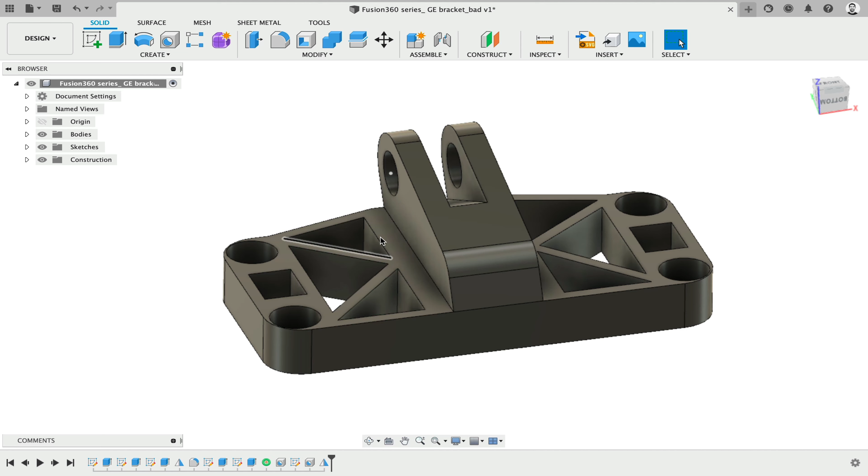My name is David and today I'll be designing and optimizing a jet engine bracket for CNC machining in Fusion 360. I got the idea from a design challenge held by GrabCAD and General Electric, in which they challenged engineers to optimize a bracket. For this video, I closely recreated the bracket and added some design aspects that could make CNC machining more complex, that are very common and that I see quite often here at Hubs. Specifically, the use of thin walls and sharp corners.

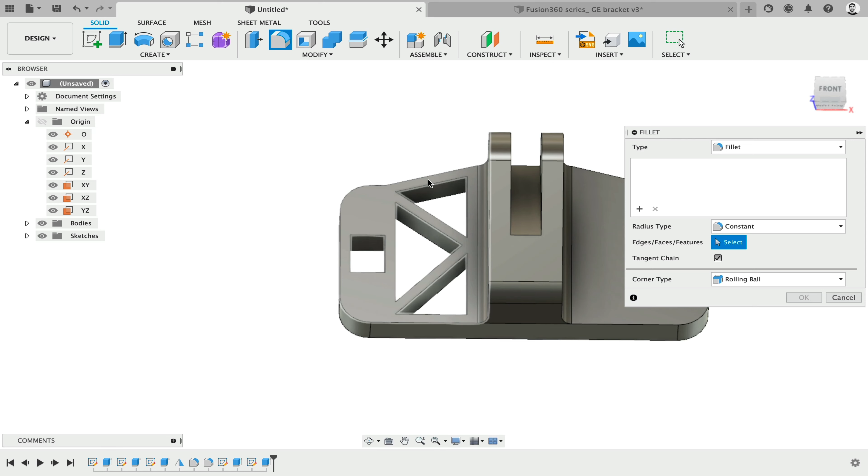First, I'll explain why thin walls and sharp corners are problematic for manufacturing of this and any other design. Next, I'll remodel the whole bracket, paying extra attention to avoiding thin walls and sharp corners. So here we have the bracket and you can see what we mean by sharp corners looking at this area.

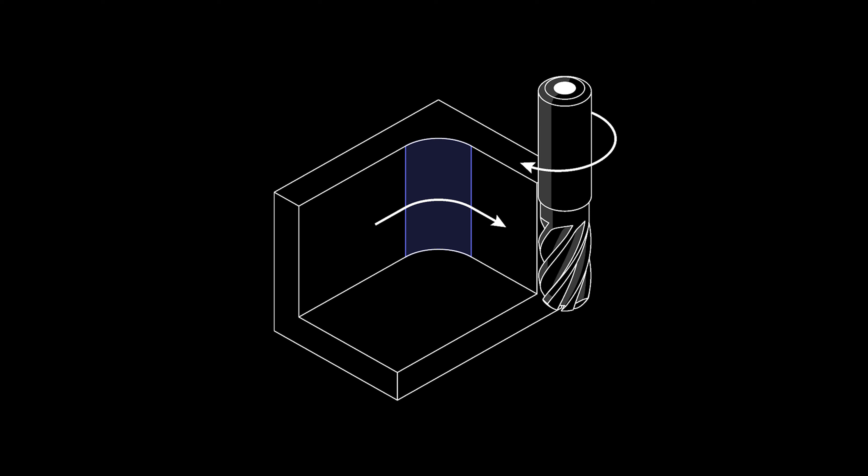The problem with sharp corners is that they are difficult to machine. This is due to the fact that the two most common CNC cutting tools, end mills and drills, are cylindrically shaped and have limited cutting length. That means that the geometry of the tool determines the radii on the part, and so the inside corners of the part will always have a radius. There are ways to make 90-degree corners in CNC machining by using undercuts and special tools as well as EDM. However, this requires more time and money in comparison to standard tooling.

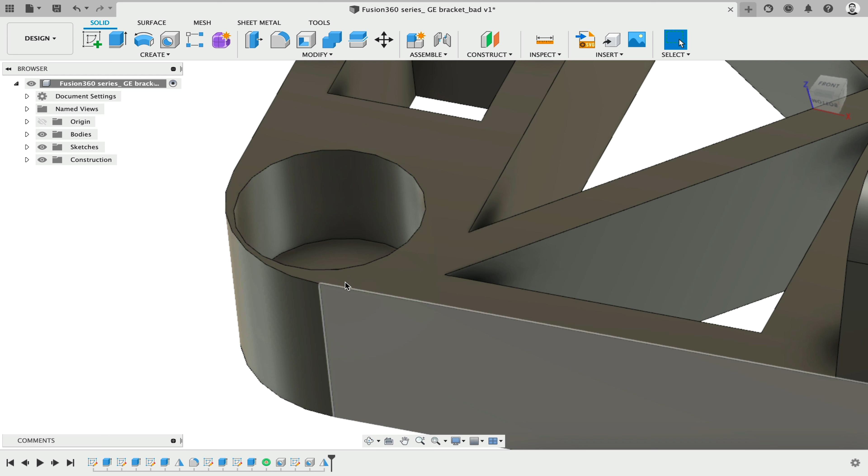Next on the bracket, you can see here that these walls on the edges of the bracket are very thin. Decreasing the wall thickness reduces the stiffness of the material, which increases vibrations during machining and lowers the achievable accuracy. This might not be so problematic with metals, but especially plastics are more prone to warping and thermal softening, so a larger minimum wall thickness is required. Now that we've discussed why sharp corners and thin walls should be avoided, let's remodel the bracket.

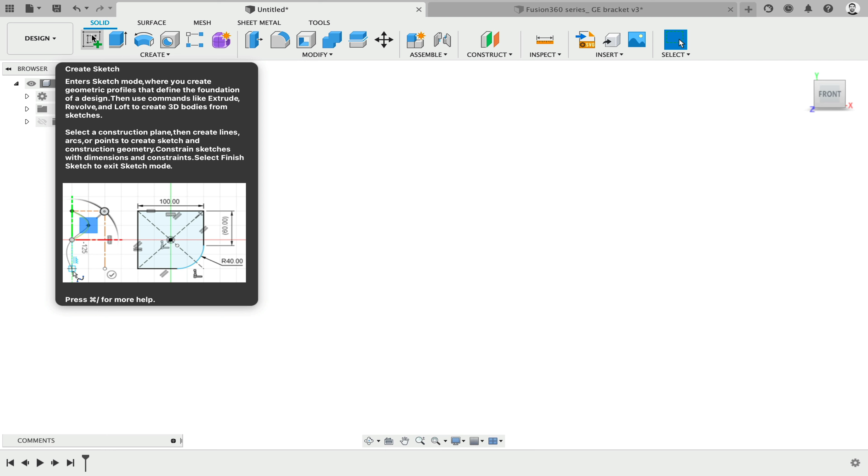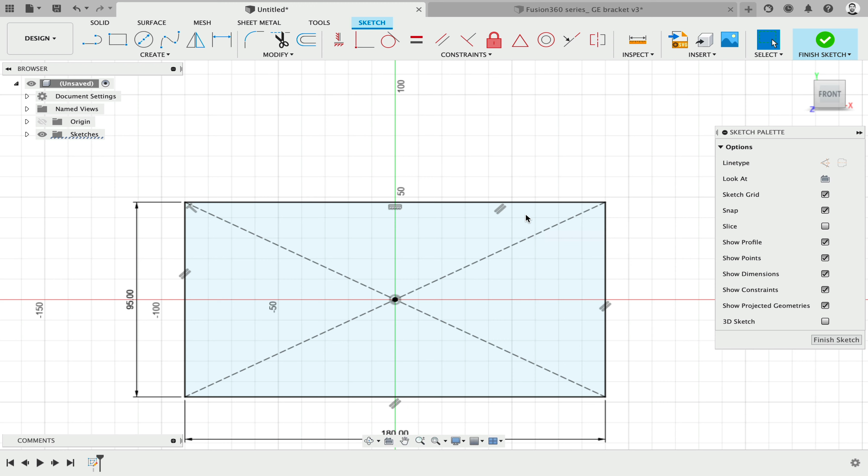Alright, now I'll start recreating the model. I'll first start with the first sketch. And just starting out with a rectangular shape, then give it my dimensions, 95 and 180, which is very similar to the GE bracket. Then I'll extrude it to be 22.5 millimeters thick.

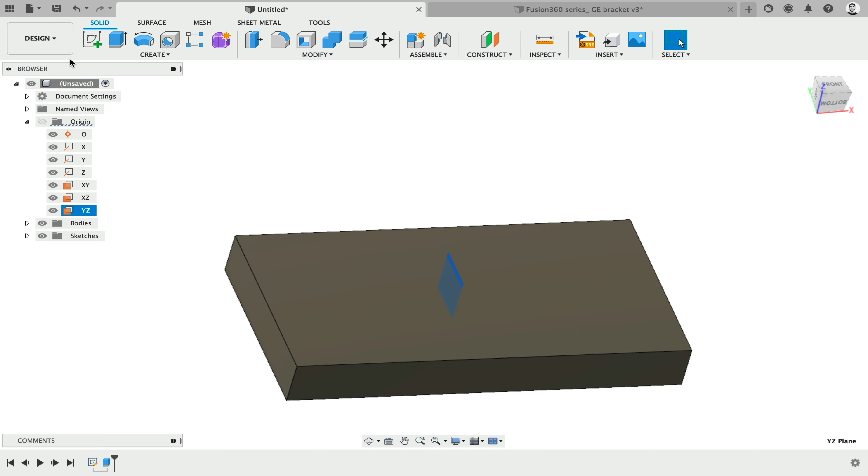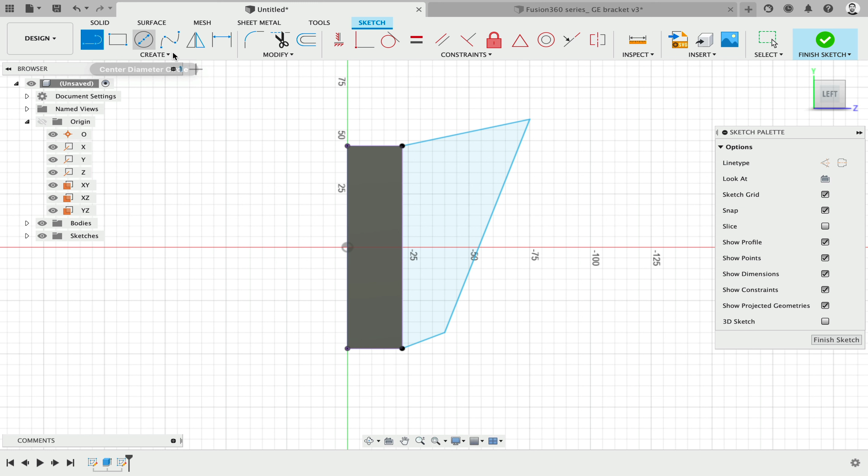Next, I'll be extruding the middle section. So I'm starting my sketch on my middle plane, just projecting this surface, so I have it in my sketch. In the beginning, I'm just kind of eyeballing my geometry. And then I'm actually placing a circle here. The circle needs to be tangent with the lines. And then I'm just trimming off the tip.

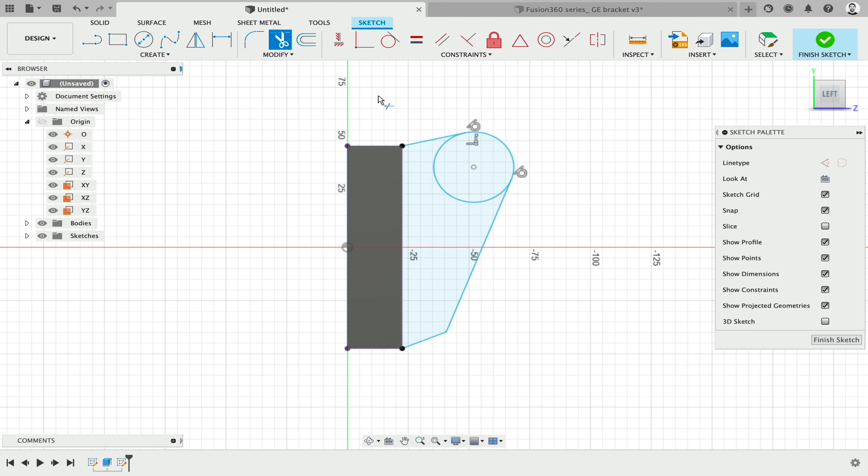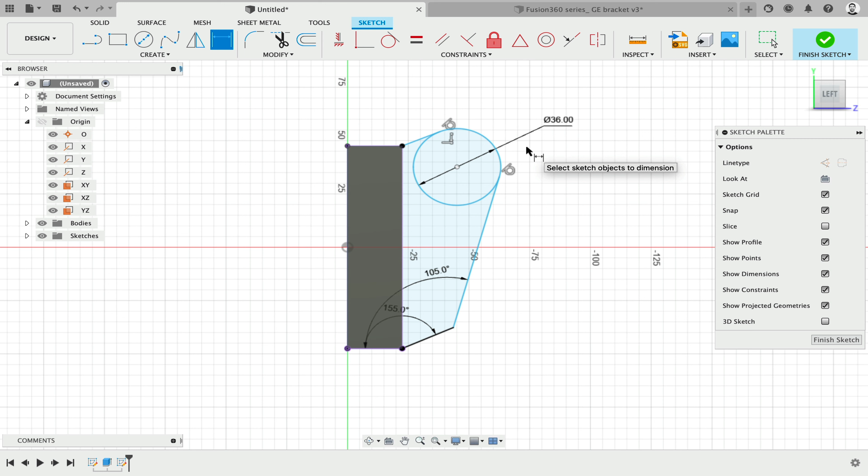And next I will be dimensioning my sketch here. I'm gonna give this an angle of 155 degrees. Gonna give this an angle of 105 degrees. The circle is gonna have a diameter of 36 millimeters. This angle is gonna be 152 degrees, and then finally the distance from the bottom of the bracket to the center of the circle is gonna be 44.5 millimeters. That's pretty much it.

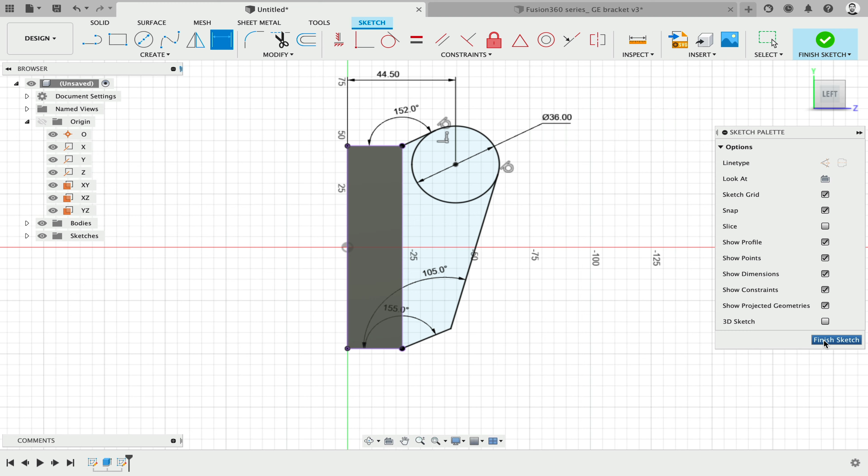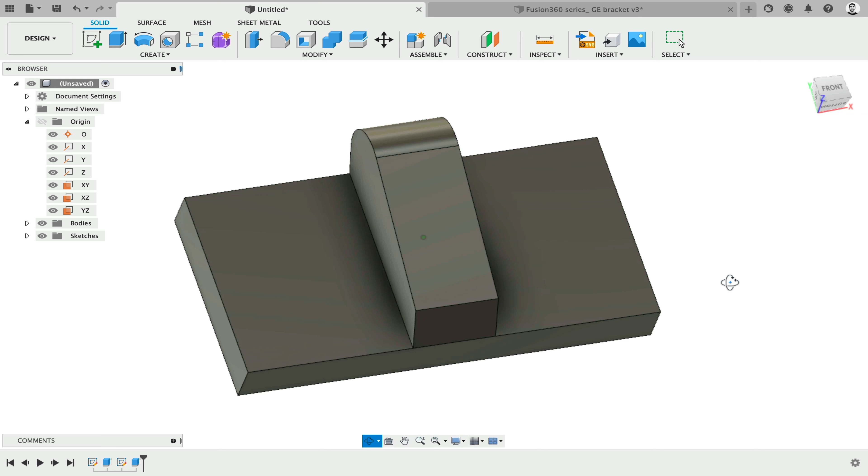That's my sketch on the middle plane, and now I'm gonna extrude the whole sketch symmetrically by 36 millimeters. All right, that's it. That's the base shape. Then I will be adding my cutoff here. And to do that, I will be sketching on this plane. First have an easy shape, and then later I will dimension them. Okay.

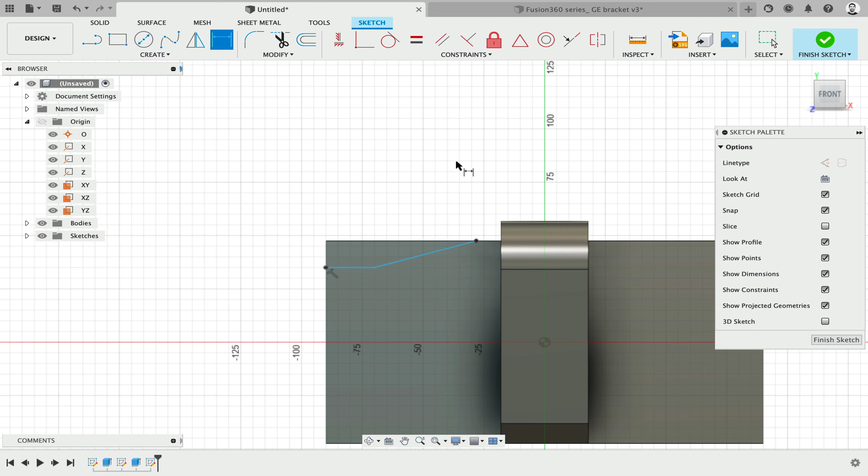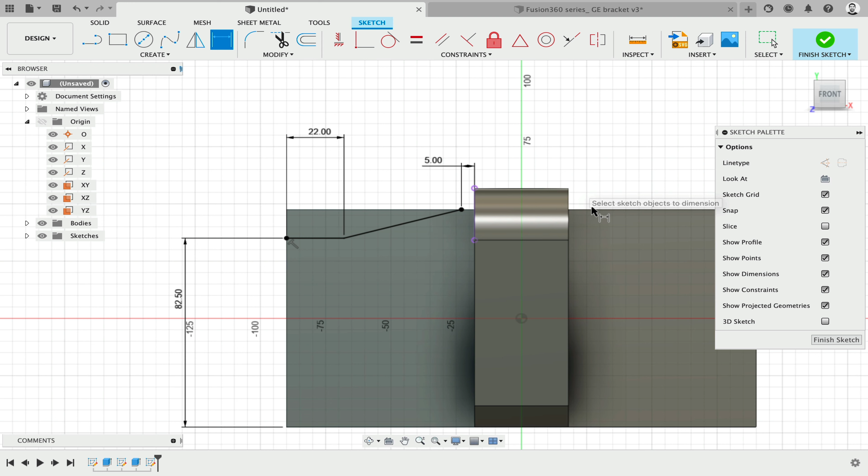This side will be 82.5 millimeters long. I hit it on the spot there. This side will be 22 millimeters long. And then for this cutoff, I will just have a distance of 5 millimeters to this side. I'm already choosing 5 millimeters there because I will be adding a 5 millimeter fillet later. All right, that's my cutout that I will be having there.

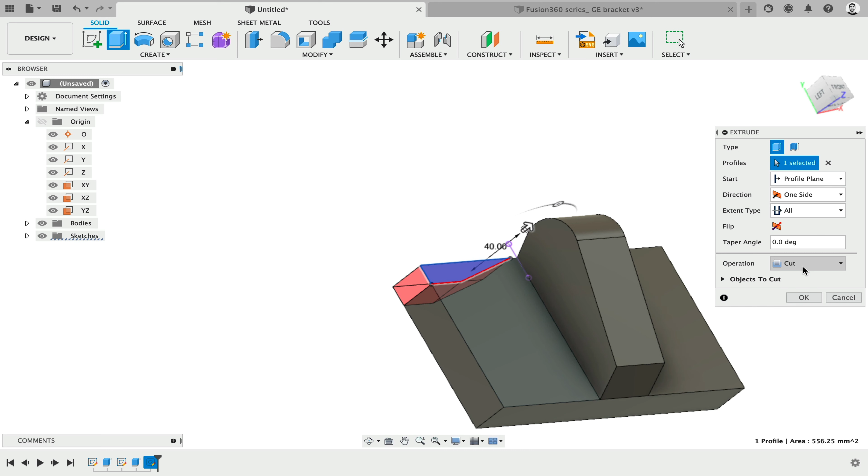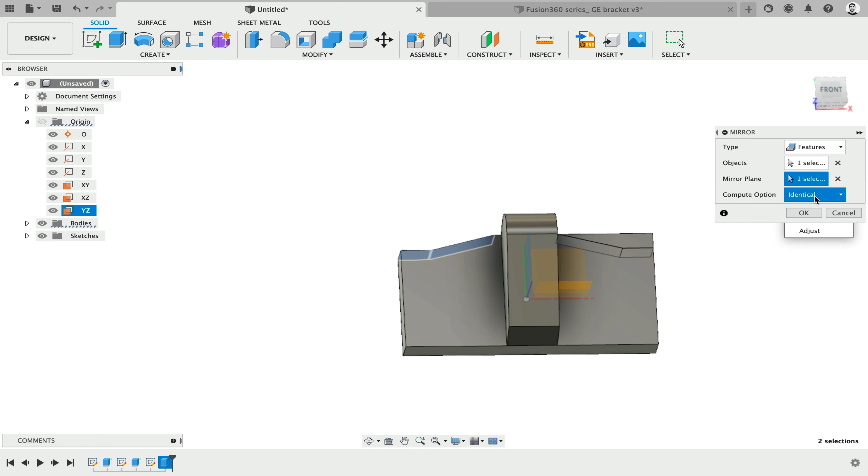Just extrude it just on one side all the way through, and it automatically goes to a cutting operation. All right, I will be just mirroring this feature on my mid plane to have the same cut on the other side. In this case, I think identical and adjust will give the same results, but for me, to be sure, it needs to be identical on the other side. All right.

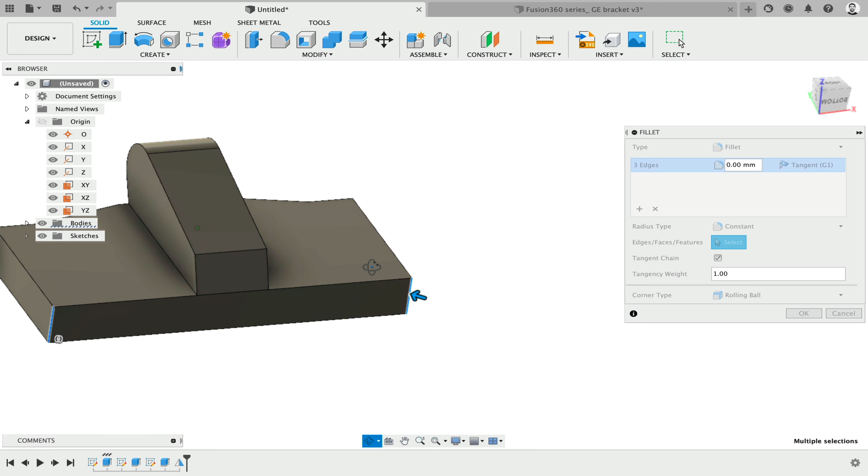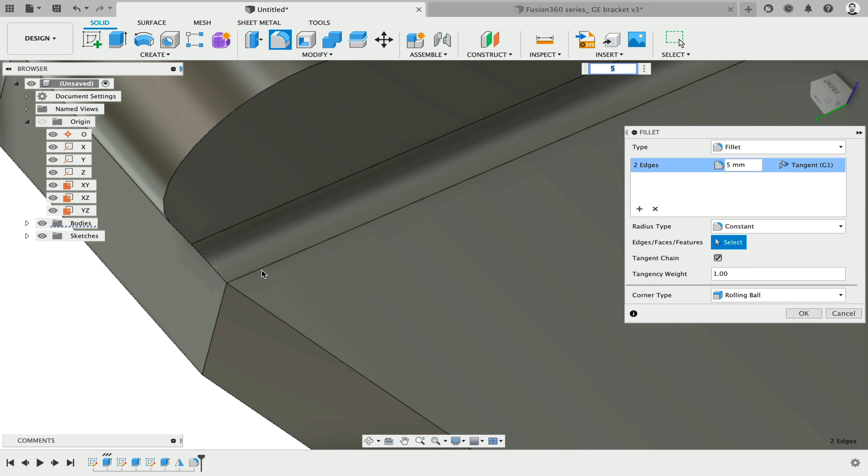Next step, clean up the geometry a little bit. So I will be adding some fillets on the 4 corners and also on the back of the part. I will give all these areas a 15 millimeter fillet. All right, the same as I said before, those sides where I left some space, give it a 5 millimeter fillet. So then you can also see it's nice and aligned with the spacing that I gave there.

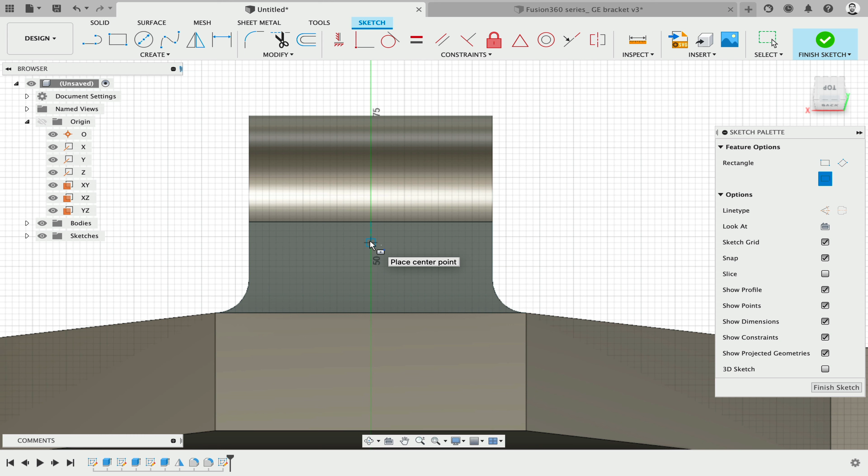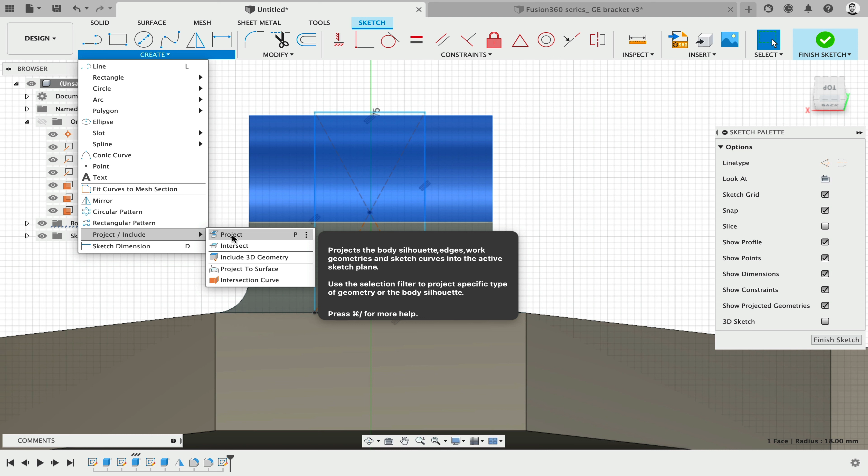I will be actually starting with a cut in the middle here, but I will be sketching on this surface here, and I will also start with the center rectangle that I will be placing on the middle line, and one corner will be at the bottom of the part, and for the others, I will be just projecting this surface and align the highest point of my rectangle with the highest point of the geometry there. The cutout will be 15 millimeters wide.

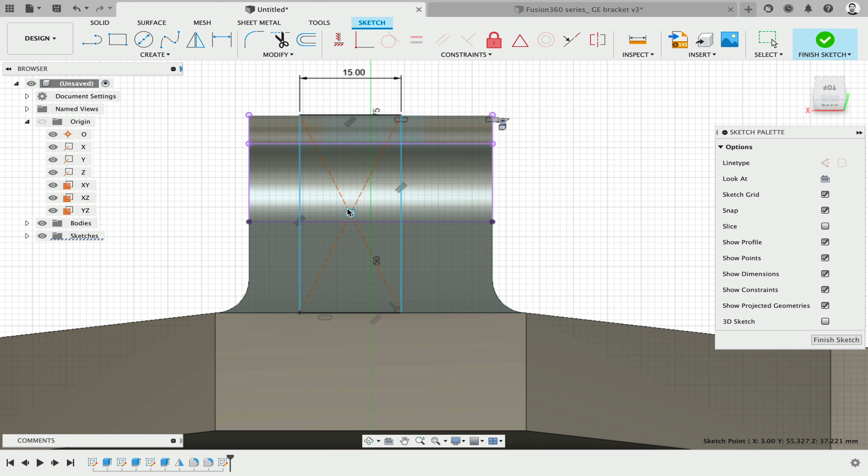It's still not fully defined. I will be defining the middle point of the rectangle to be vertically aligned with the middle point of the part, so the center axis of the part. That's pretty much it for this cutout. Very easy.

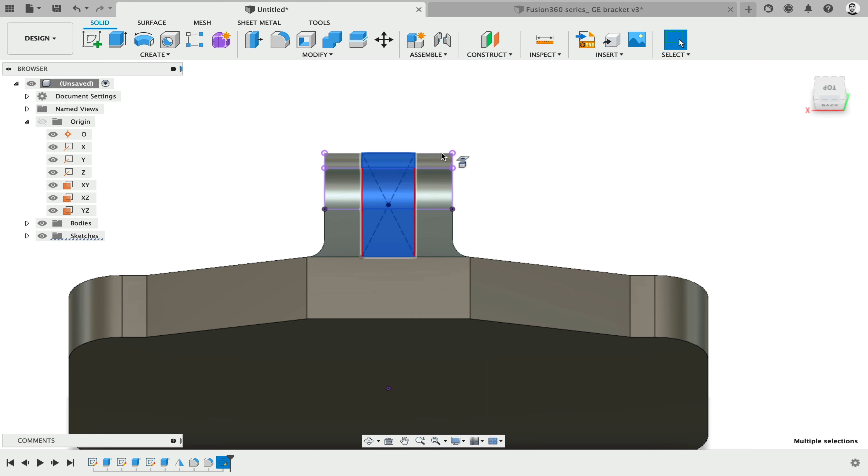Just select all the geometry, all the squares that I want to use as a cutout. Same here. Extrude all the way through. Flip the side. Automatically turns it into a cutting operation, and then just remove that material from the body.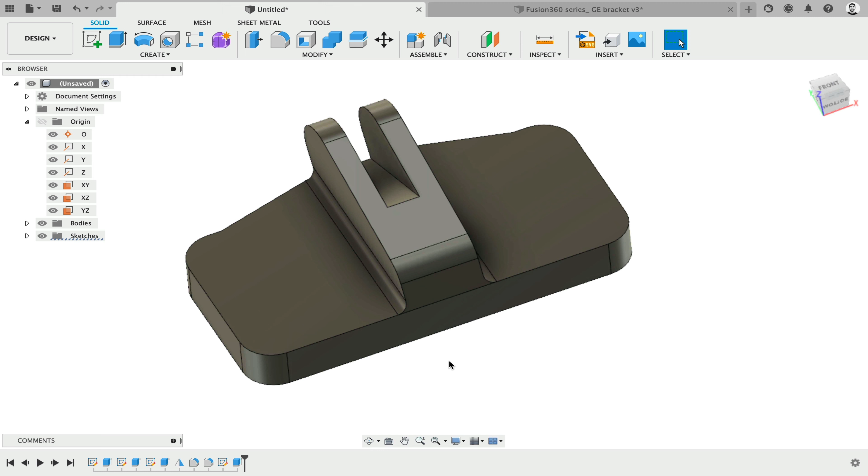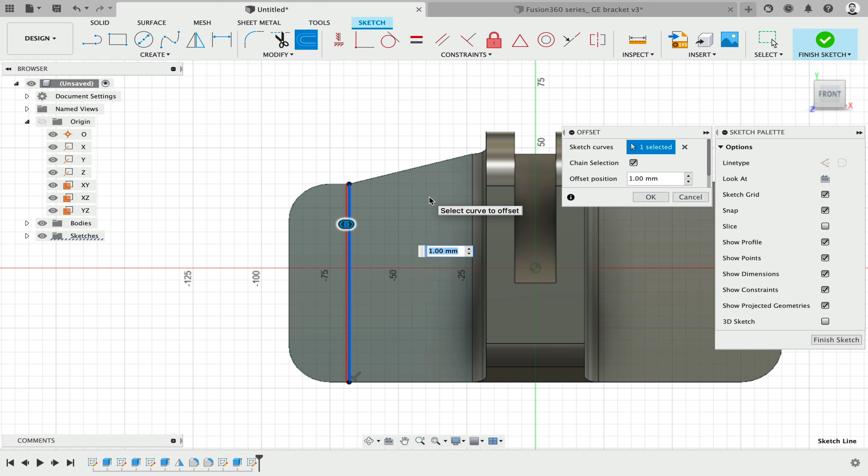All right, next I will be doing the cutouts to reduce the weight on the part, and I'll be starting by creating a sketch on this plane. First thing I'll do, I will draw a straight line from here to here as my reference point. Then for all of this, I will give it a 5 millimeter offset. This one doesn't want to. I will select the edges one by one. Have a 5 millimeter offset on the inside, so -5.

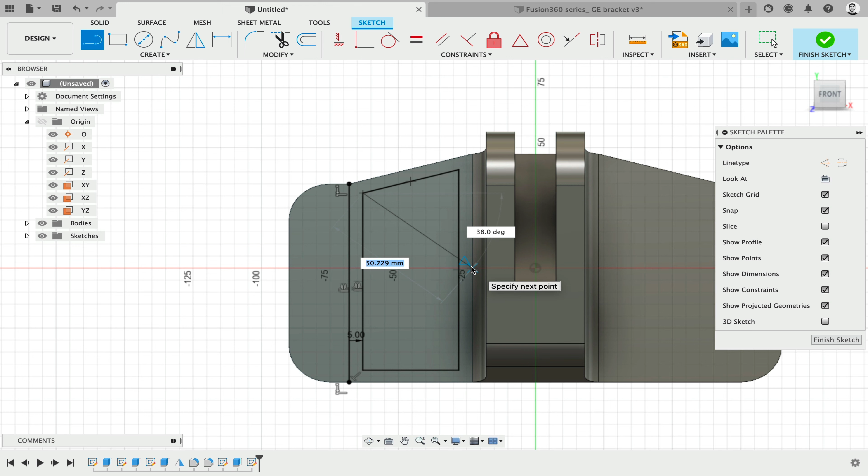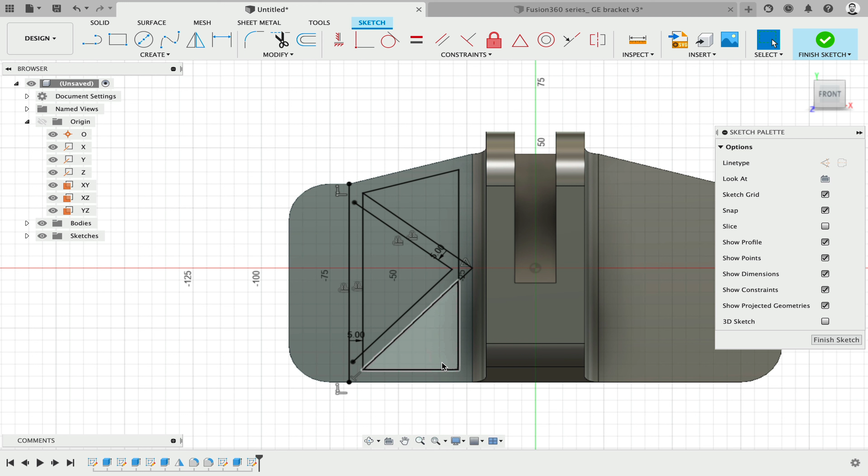And then I will be starting to draw my triangles to divide the spaces, and have another 5mm offset from these lines, 5mm. Alright, and I'll have another rectangular cutout here, which I will be having a 30mm distance from the outside edges on both sides. I will be just copying this value as a reference, so it would change if I had to adjust. From the outside, also here, I leave 5mm spacing.

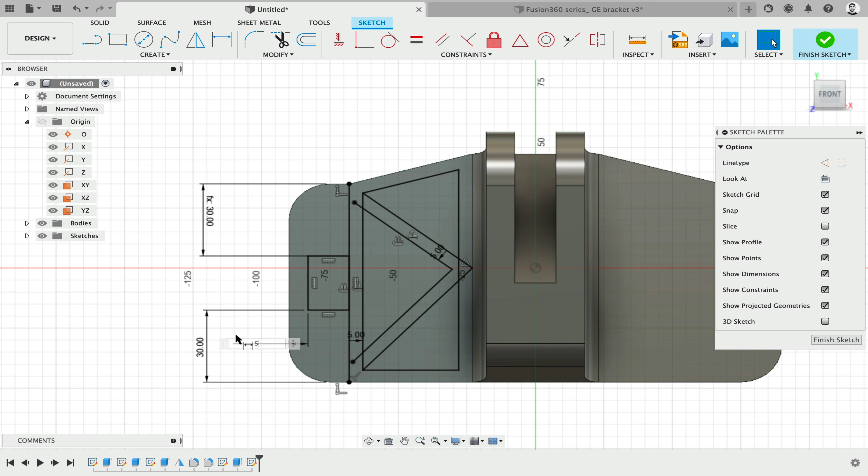Alright, that should define my geometry for the cutouts. Let's see if I did it properly this time. Extrude all the way, flip it around so it turns into a cutting operation, and then we have the cutouts.

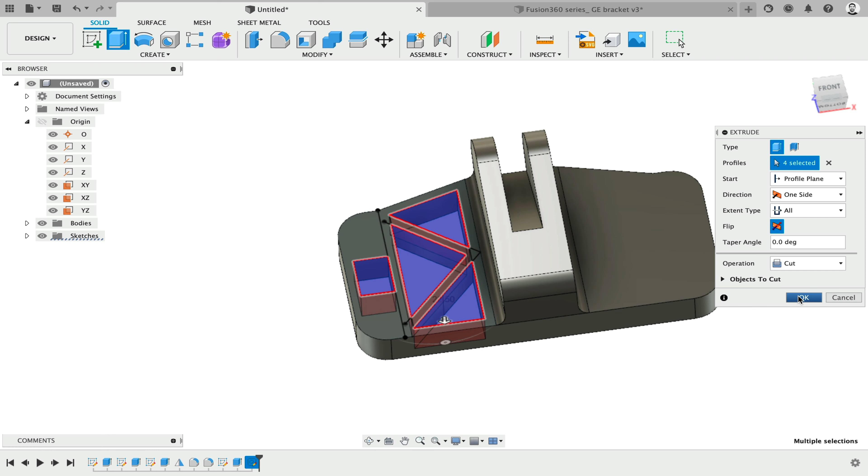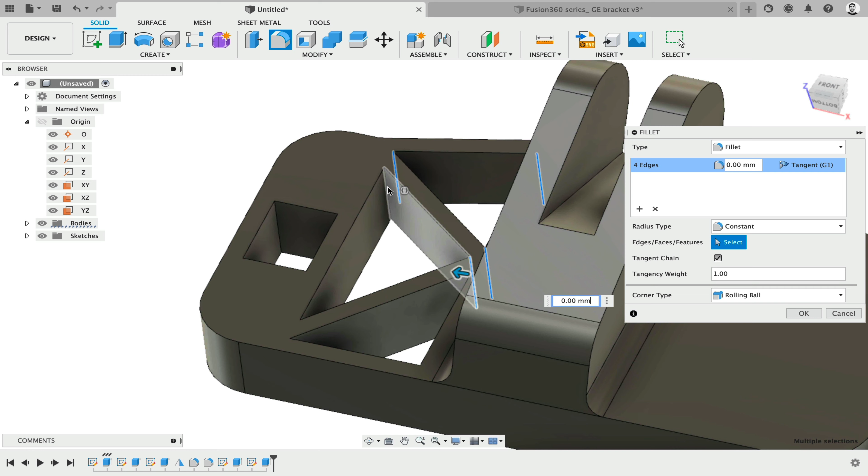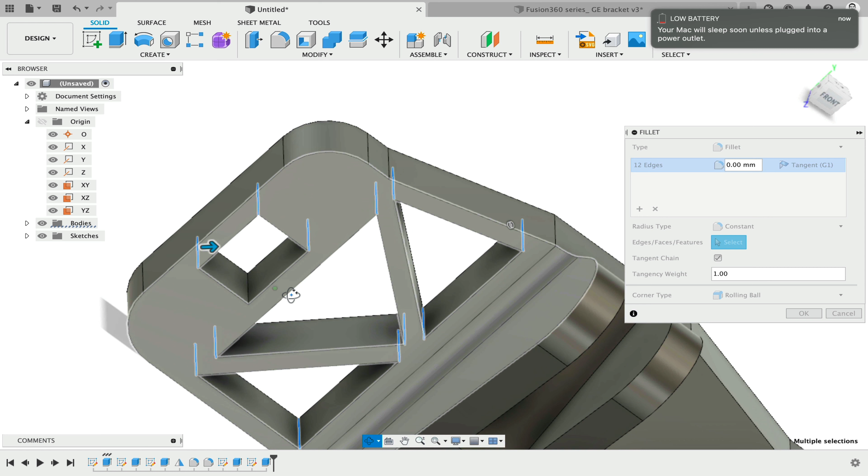Alright, let's give it some fillets. I think I will be giving it a 5mm fillet, so it should be easy to machine with the same tool. First I select all the edges. Oops. Give it a 5mm fillet. Hit enter. And that's it. Nicely shaped cutouts that are easy to machine.

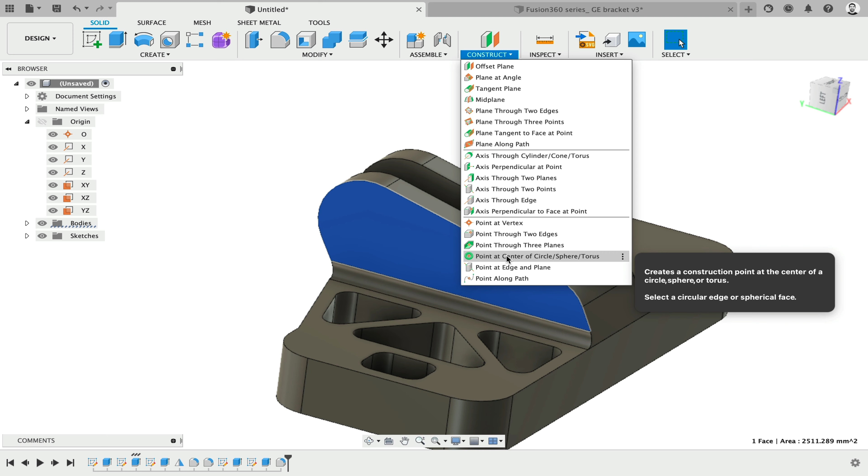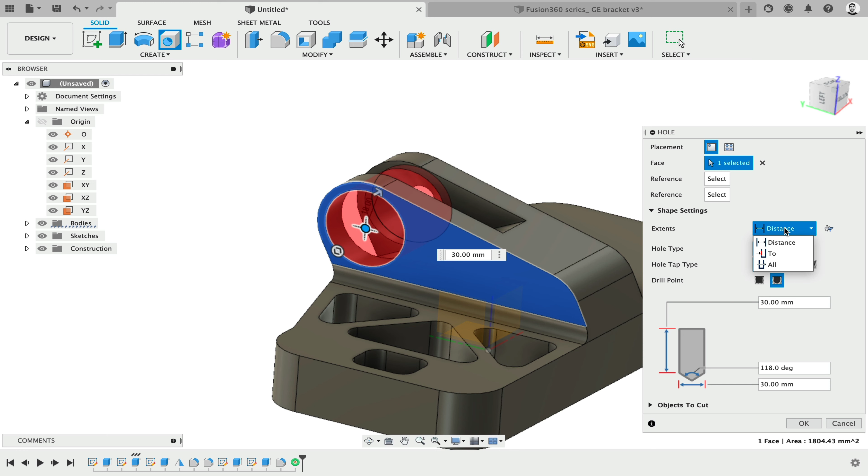Next I will be creating the hole to attach to the main bracket. I will be just creating a point, a construction geometry at the center of a circle. So I'll just be selecting this edge and it automatically creates a center point. And then I can just create a hole that I will be placing on this face, using this point as reference point, selecting that it will extend through the whole geometry and have a diameter of 30 millimeters for that hole. Goes all the way through. Done.

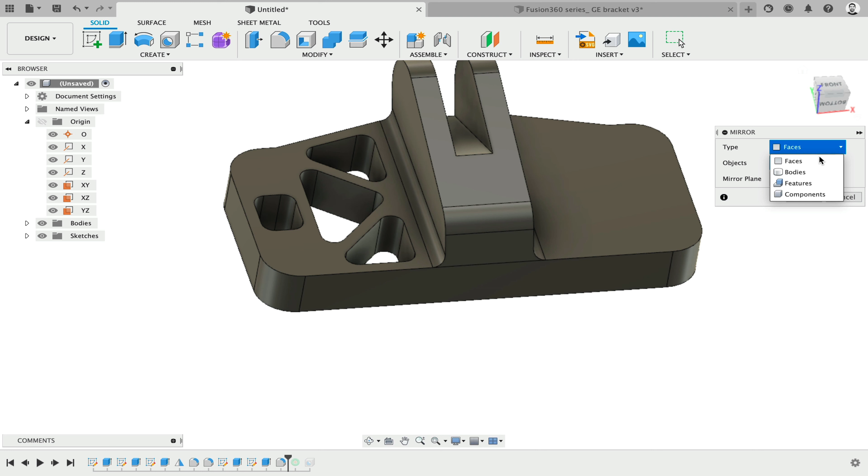I go one step back, something I forgot. The cutouts that I made before, I will also be mirroring them on the other side. To do that, I will select features. I will select the cutout feature as well as the fillet feature. As the mirror plane, I will use my middle plane and have identical cutouts. That's it. It's also on the other side.

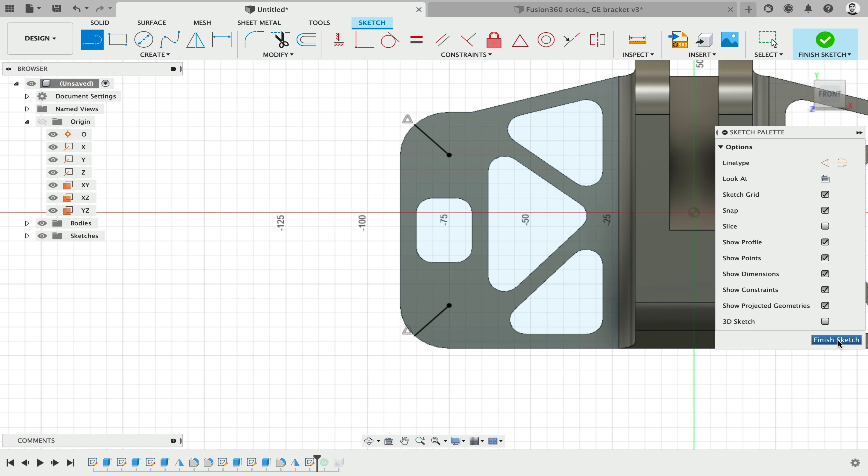Then I will be creating a little sketch on this surface again to position my holes. I will be starting from the center point of this circle and go straight to the corner to be perpendicular with the radius. Do the same on the other side. That's my sketch actually. And then I will be placing multiple holes based on the sketch, and I will be selecting these 2 points.

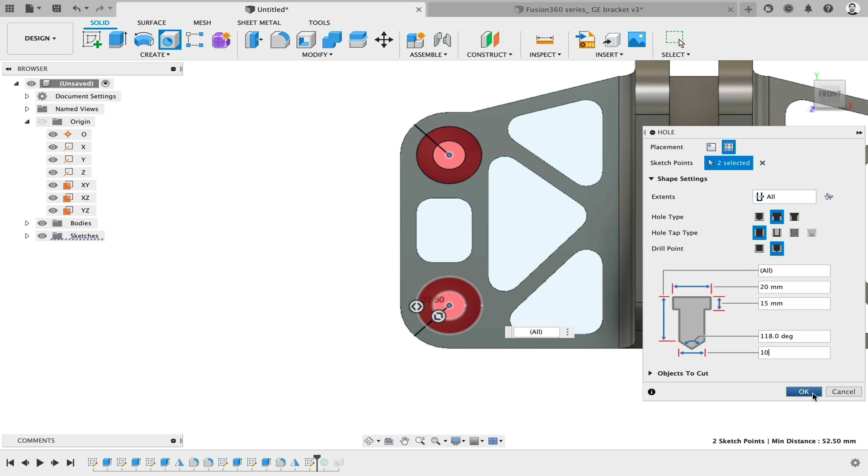This time I will be selecting a counterbore hole, also going all the way through. The top diameter is 20. Have a counterbore depth of 15 millimeters, and then the bottom diameter is 10 millimeters. That's it. Leaving enough space to the edge of the part to not face any issues with thin walls, so the part should come out nice and clean. And then I go forward in my history again, so I have that hole again.

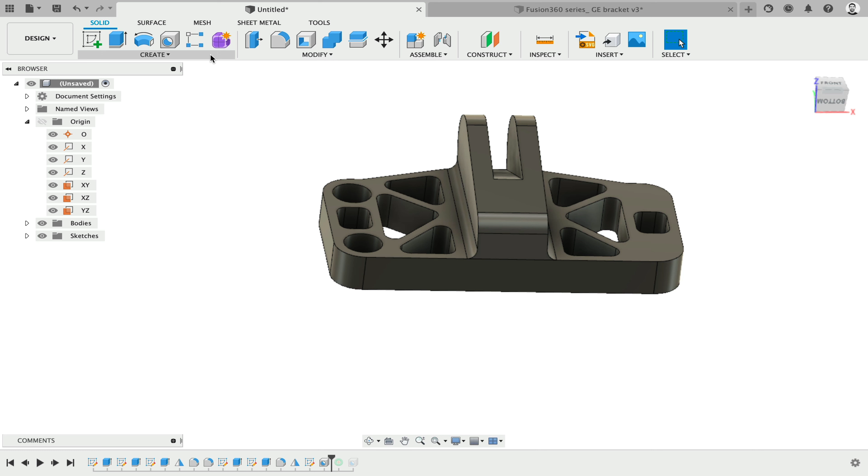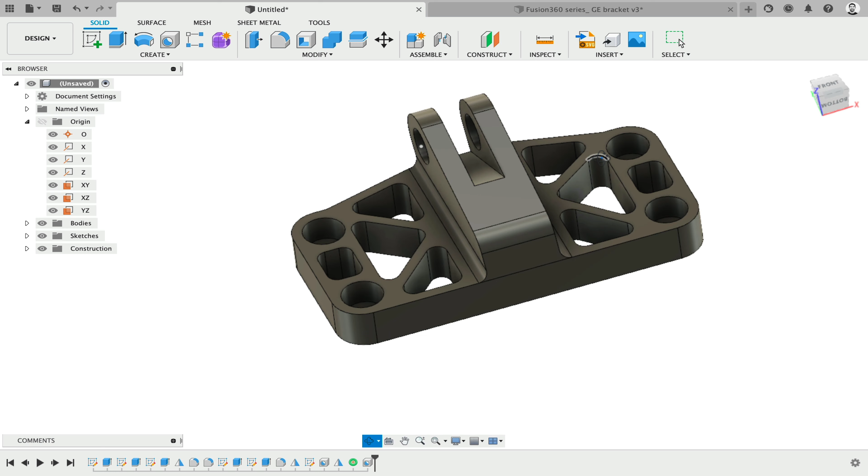I actually go back again and do the same mirroring action with my counterbore holes that I just created. Select again the middle plane to mirror those holes, and that's pretty much it. Have the clean part. Should be easy to machine. Yeah. That's it for this video.